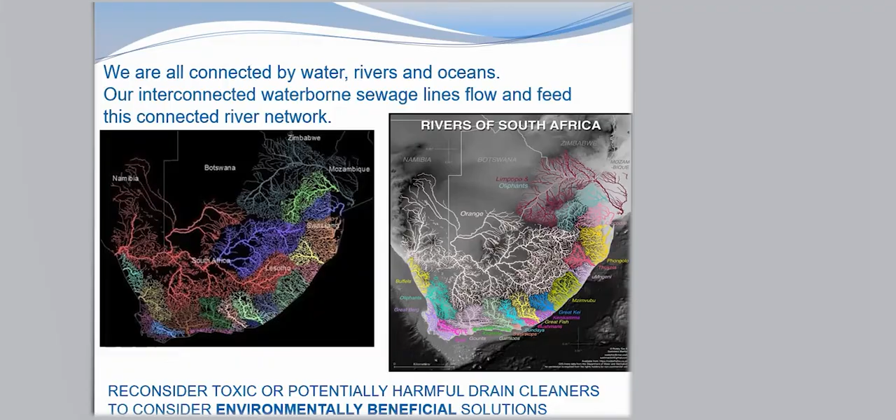No discharging of polluted fat trap wastewater into our landfills and rivers. This continuous discharging of untreated fat trap waste into landfills, or worse our rivers, has contributed to the decline in fish and plant life, along with wastewater treatment works pollution.

Excess phosphates and nitrates feed the aquatic weeds and algae in the dams.

From a legislation point of view, no landfill of liquids since 2019. Landfill prohibitions became effective on the 23rd of August 2019, and the Department of Environmental Affairs' LB Modise confirmed this regulation, with local legislation banning all liquid waste from landfill.

This signaled a positive shift in South African waste legislation. This legislation prohibiting liquid waste disposal was gazetted in August 2013, with a 6-year transition period for the industry to put the necessary measures in place.

So the rule is, if you can pick it up with a spade, then it's not liquid. A key benefit of this legislation, according to Modise, is that the country's groundwater reserves will receive protection from seeping hazardous liquids.

Landfills are known to produce leachate, liquid bearing soluble and suspended solids after it passes through matter, and this is difficult to manage and treat. This leachate has the potential to seep into groundwater pools.

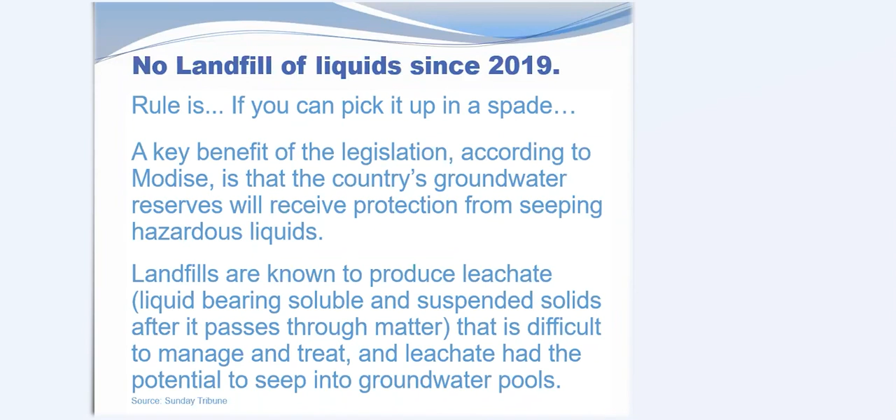Robert will carry on from this side. From a plumber's point, and also as homeowners, you've got to look out - if you see anyone dumping fats or light liquids into dustbins and into the drains, you have to report it. It's also a responsibility as plumbers as well.

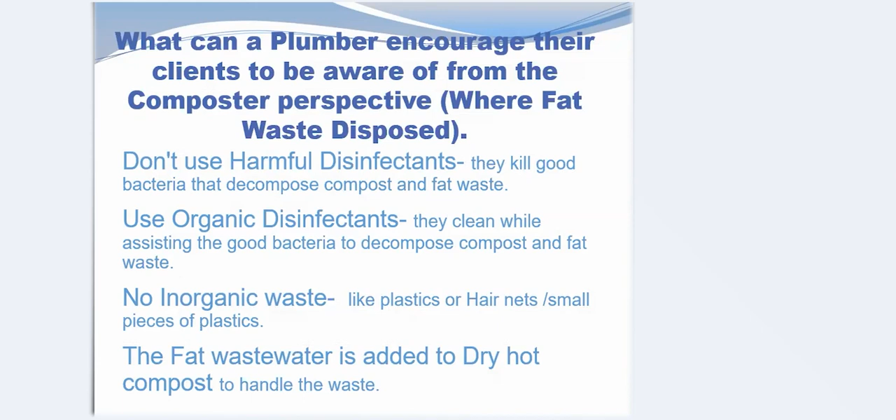So fat trap bioremediation, or microbes, and the plumber's role: it's a tool for the trusty toolbox. Microbes, just like your monkey wrench, are a very useful tool. And if you're on site and you've got everything else but the monkey wrench, but you need it, you're a bit stuck.

And so we believe this is a vital tool that can naturally help liquefy fats, oils, and greases without the use of potentially toxic, acidic, harmful, or carcinogenic chemicals related to unblocking long-term buildup in pipes. And it's safe for fish, plants, humans and animals. There are big health advantages of treating fat traps and drains using microbes.

That bioaugmentation process converts the anaerobic sludge environment into an aerobic one, killing off the waterborne diseases. So it turns the solids into gas and oxygen. And included in these blends are bacteria that compete with the cholera bacterium for food source, thus preventing cholera from spreading.

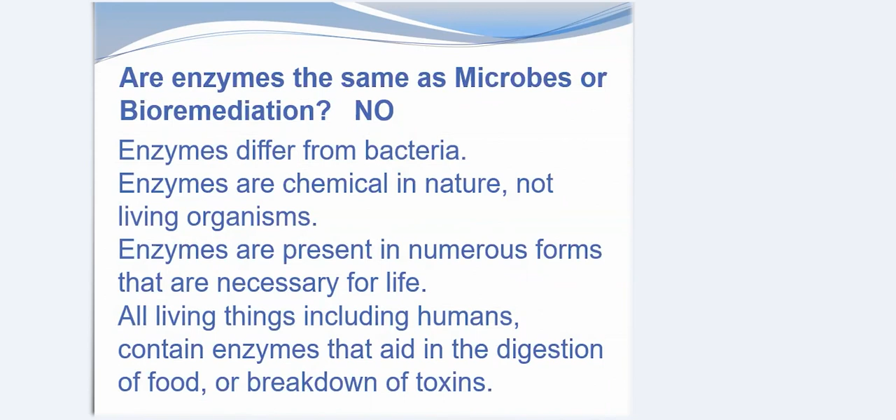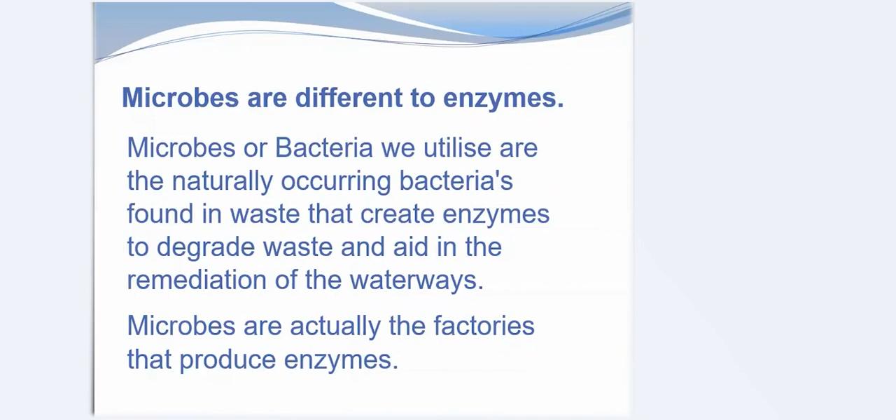The microbes or bacteria we utilize are naturally occurring bacteria found in waste that create enzymes to degrade the waste and aid in the remediation of the waterways. So microbes are actually the factories that produce these enzymes. And when we look at this model as a connected network, it's a tool for a top-down model, ideal for plumbers. It's like a probiotic for your drain.

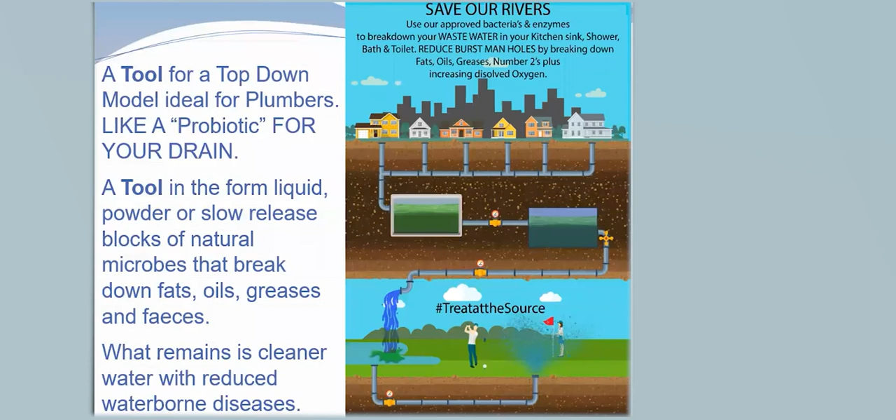So just like when you go to the GP and he or she gives you a prescription of antibiotics, they will now always give you a prescription of probiotics, and that's to restore the balance in your gut. So this is a tool in the form of a liquid, powder, or slow release blocks of natural microbes that break down the fats, oils, greases and feces. And what remains is cleaner water with reduced waterborne diseases.

So Robert? Sorry guys, so with the enzymes and the fats, you can actually pour it into the manholes, and it actually starts to break down the fats. So it breaks down the fats of long build-up, especially in complexes. We know that there's multiple people staying, they're washing their dishes and all this stuff. And there's always people that they'll say they don't pour the fats down, but they're cleaning the pots. There's still all of that.

It ends up in our drainage system, and that clogs up a line. And you need something that can break the fats down the line, especially even with the fat traps. You can pour the enzymes directly into the fat traps so that it can break down the fats in the system.

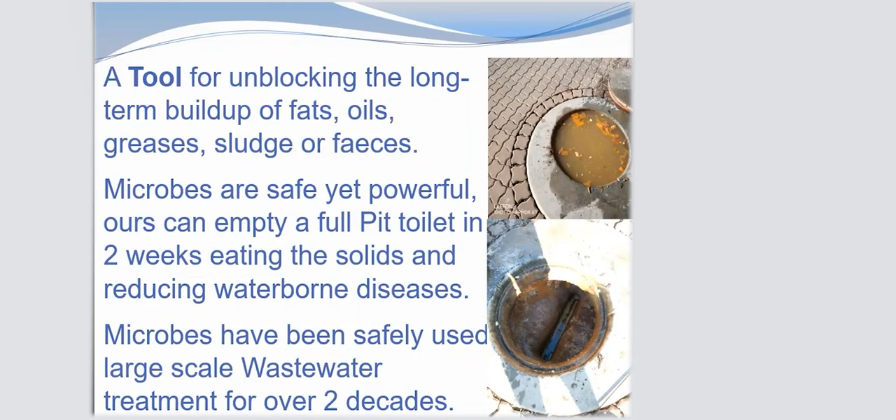And if I could just add in there, these different microbes have been added and used in large-scale wastewater treatment works in South Africa for over 2 decades. So there's a lot of history with this. Robert? Yeah, so we need to reconsider the chemicals that we use. So we got to look at stuff that doesn't harm the environment. And if you look at it, will you pour a bottle of drain acid into a fish pond or into your koi pond? No, you won't.

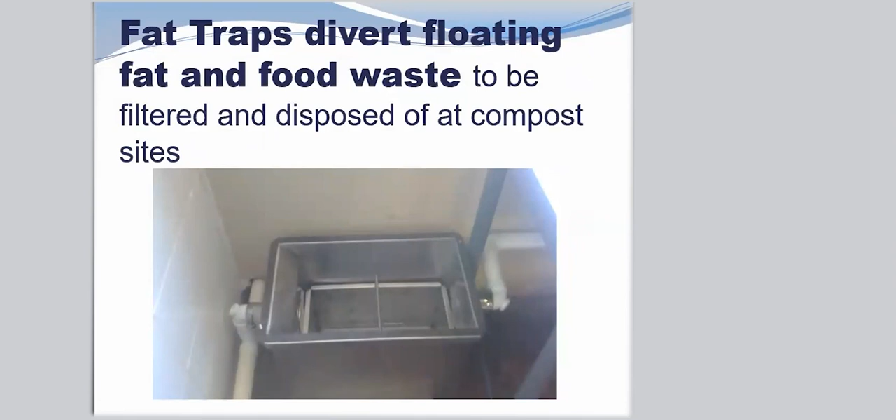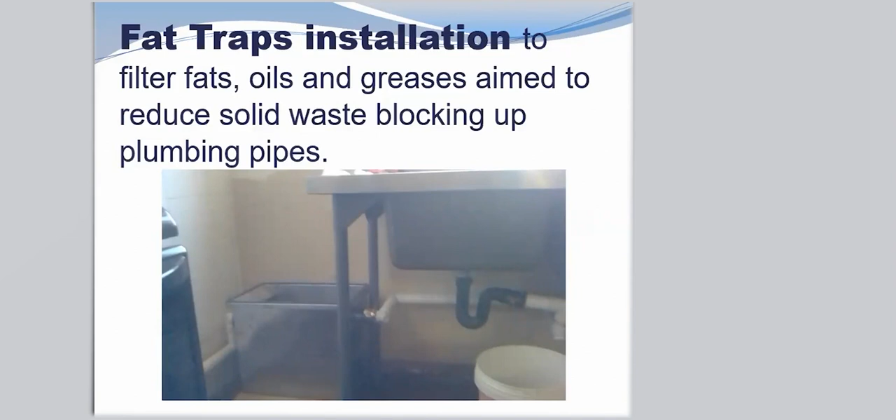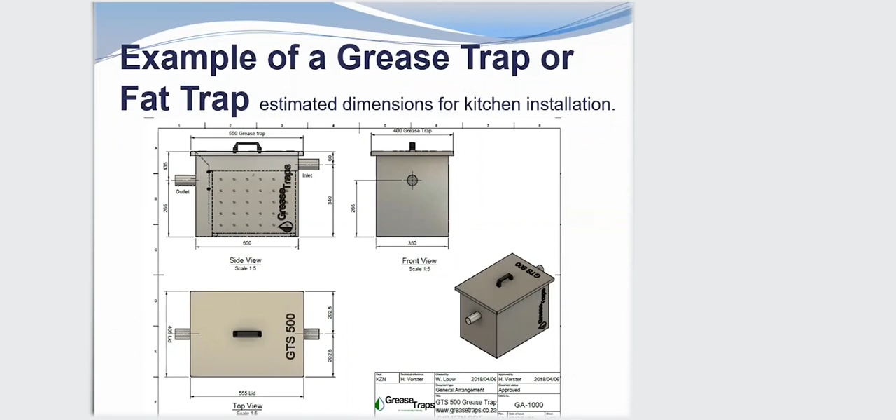You can move to the next one, Tom. And these things have to be maintained regularly, because otherwise it is going to start blocking the system. There's also a little bit of a side view of a grease trap or a separator. You separate the fats from the water. As you guys can see, you've got the inlet. It'll go into the bucket and the basket where it separates the fat, and then the water will go through. As you all know, oil and fat is lighter than water, so it will rise to the top, and the water will come through and discharge out the outlet there.

And this was from a little canteen. In this fat trap, the fat had actually solidified. So every time they used the water, it would just pour out the sides and run down the street, because this was a fat trap that wasn't maintained. So we need to look at breaking down the fats as well with something that can break down and eat them, with a natural bacteria that breaks down the fats. What remains is cleaner water, which reduces waterborne diseases. Now, this process removes smells and flies in 24 hours as it liquefies.

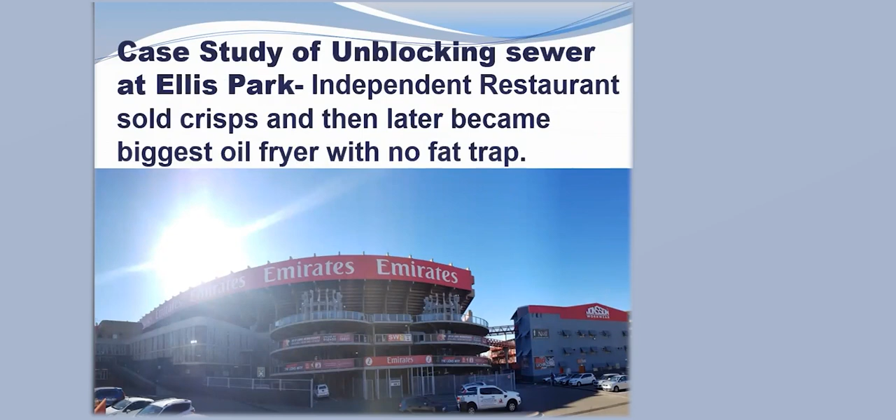And here's a case study. I'm sure we all know this stadium, Ellis Park Rugby Stadium. It had an independent restaurant which was just selling crisps and Coke drinks and things like that, and then later became one of the biggest oil fryers with no fat trap installed. And so the knock-on effect is pretty quick. The challenge they also had was that restaurant was also pouring used cooking oil down the drain.

So this was the manhole in 2018 before we treated, and you've got a thick fat crust. You can barely see the channel, and there was no flow confirmed. And Steven, who was the head plumber, alluded to me that this thing had actually been blocked for many, many years, and they tried the rods and they tried the acids and they tried everything they had at their disposal. And for 5 years, they hadn't managed to get it right.

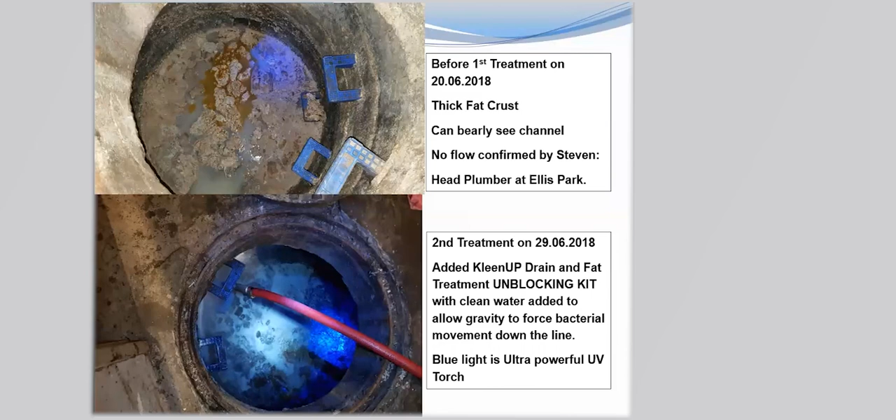And so we added the drain treatment with clean water and allowed gravity to force the bacterial movement down the line. That blue light you see there is just a UV torch. So this is before the third dosing here. You can see it's much more liquid. The fat crust has broken down and the wastewater is very liquid, with fist-sized chunks of fat rising to the top.

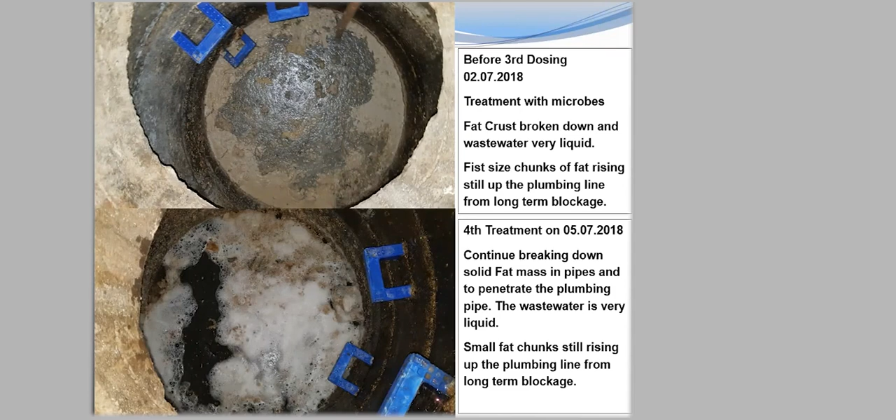So as Robert said, fat is lighter than water. So when you start to clear these lines of this long-term buildup, you have to do another dose afterwards because you get these chunks floating back up and you need to break those chunks down. And so by the fourth treatment here, we're continuing to break down the solid fat mass in the pipes and to penetrate the plumbing pipe. And this wastewater now is very liquid with very small chunks of fat up the plumbing line.

And the image on the top left here, that was the manhole downhill or downstream from that blocked manhole. And it was just solid fat. There was no flow. We added water. This is after 2 doses. We hadn't managed to get it to budge. And then on the third dose, we've got movement there. I was going to add a little video there. It's not very exciting, but you can just see the water flowing there. And the manhole was unblocked for the first time in 5 years, which was quite an amazing feat.

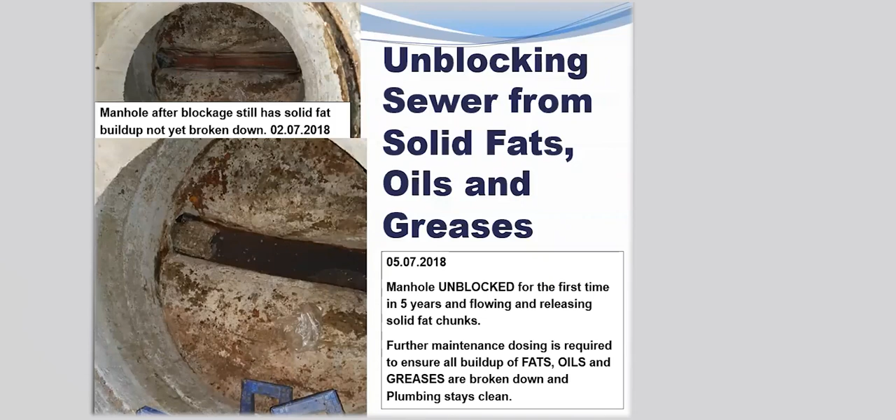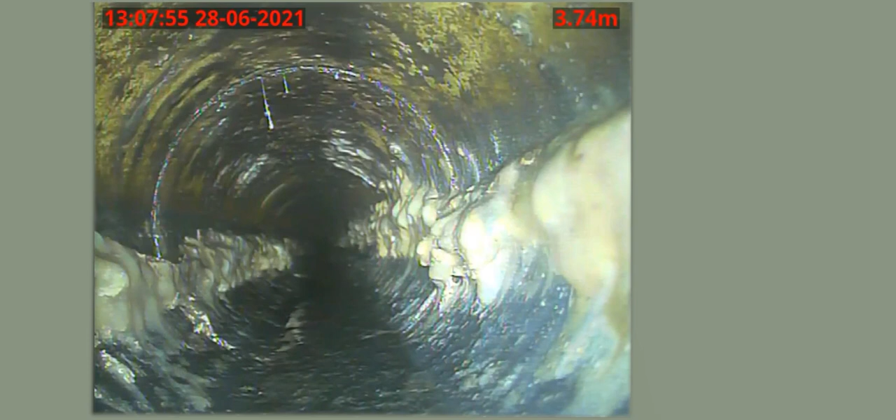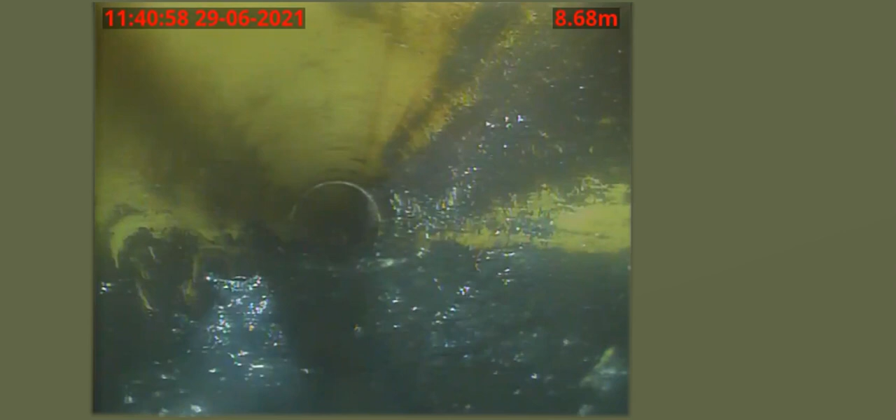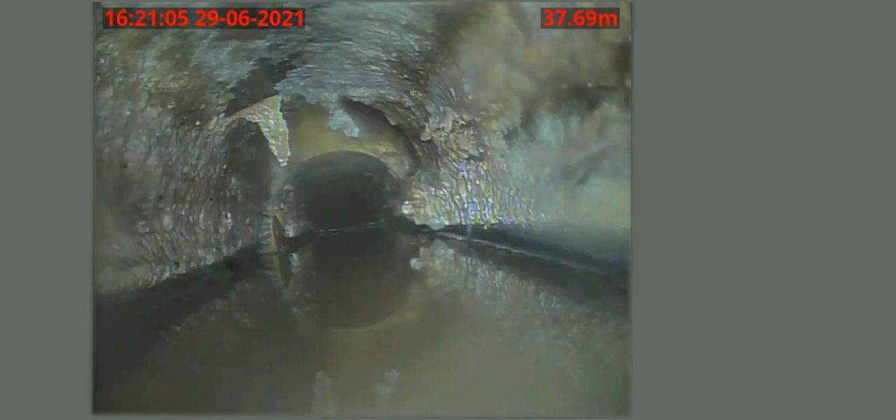This is just little images of how the fat builds up inside the lines of a drainage system where your camera went down. As you can see, the fats build up, and also a lot of the drain acid that's been poured down the line to try and break down the fats. But it just eventually solidifies. You can see the fats crusting up there. And as you all know, this will eventually start solidifying and becoming bigger and bigger, closing the holes there.

So I'm sure you guys know that in your pipe, you're going to install a new pipe. As you start getting water flowing down it, you get bacteria forming inside this pipe. And then a protective layer of slime builds up over that bacteria. And then the slime prevents oxygen from getting to that bacteria. And then that environment becomes anaerobic.

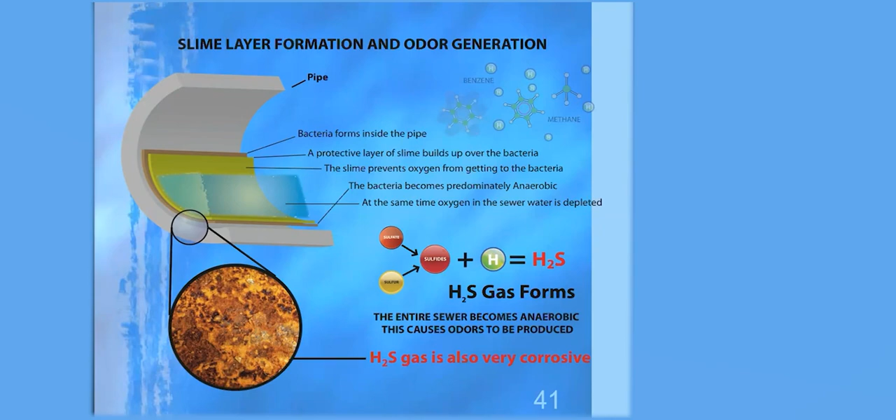And at the same time, the oxygen in the sewer line is also depleted. And then this is when you start to get all those noxious gases and things like that. So the entire sewer network becomes anaerobic, and that's where you get your odors.

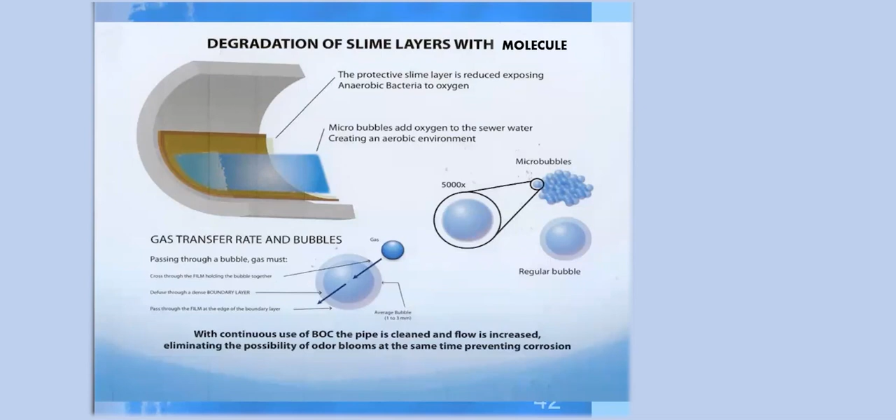And so we degrade that slime layer with these different molecules. The protective slime layer is reduced, exposing anaerobic bacteria to oxygen, and then the microbubbles add oxygen to the sewer water, creating an aerobic environment, and this helps with that remediation.

So this is an ongoing problem. Fat traps and grease traps and drains are blocking, and manholes are blocking, and then regularly bursting and flowing into stormwater drains, which then flow into our rivers.

And to give you an idea of what's going on in our local economy, in Midrand alone, according to a Joburg Water official, there are 500 burst manholes a month, which is just staggering. And Ekurhuleni says there are about 80 burst manholes a month, and their local area engineers say that their bakkies are out all the time unblocking. So they're not too sure if that number is accurate.

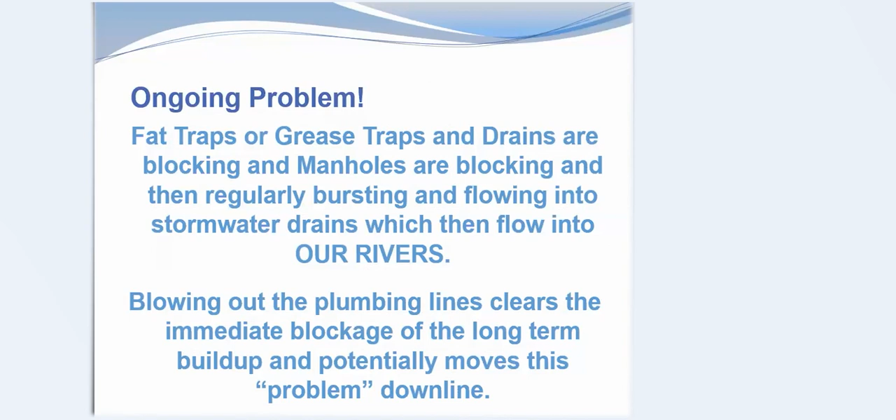So you've got really efficient and clever tools, like the jet truck blowing out the plumbing lines. It's very effective at clearing that immediate blockage. But unless you add these microbes into the jet truck, as we explained in the previous slideshow, you're not getting rid of that physical mass. You're literally stripping the pipe and clearing it, but it's moving down the hill.

So with a nature-based solution, you treat your fat traps and your grease traps and your drains with these microbes or probiotics, and you naturally break down the solids into liquids. And this helps clean up the long-term buildup and clears the foul odors without the use of toxic products.

And your butcheries and bakeries can continue operating while dosing. Nobody needs to clear the room or leave the room because of noxious, harmful drain cleaner smells. So this top-down approach can help to collectively reduce the burst manholes while solving your client's needs.

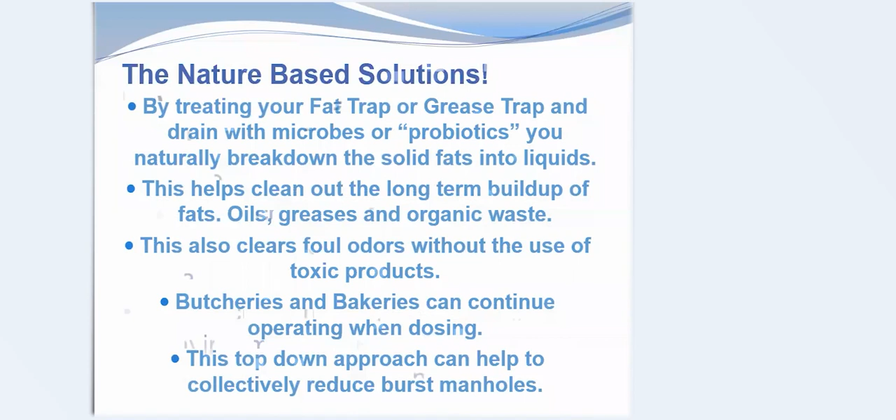How can microbes help increase revenue streams for the plumbers? You solve long-term repeat problems and switch to a monthly or a biannual treatment to ensure free-flowing drains, depending on the site and how frequently it would need to be dosed. And you can actually contact your old clients that you maybe haven't heard from for a while, or your current clients, to introduce this environmentally beneficial model and to help improve their waste footprint.

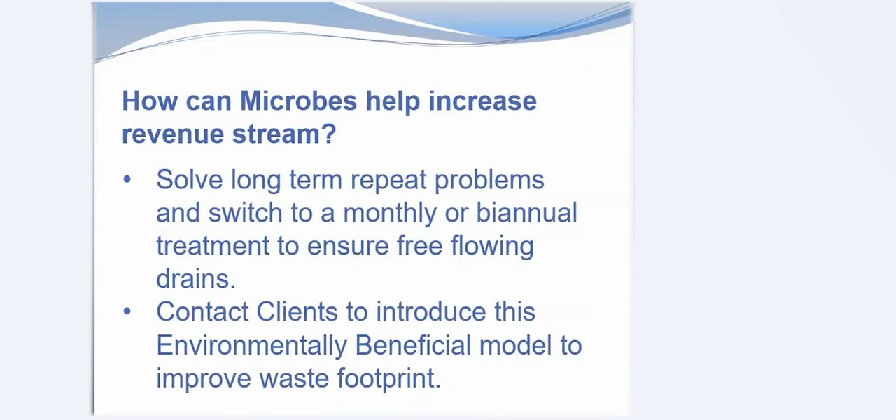What we're finding now in the industry, because I've been doing this for about 10 or 12 years now, is that the shareholders of the businesses are now mandating that change needs to happen. And so we can now actually attract new clients seeking alternative natural solutions to waste and fat treatment.

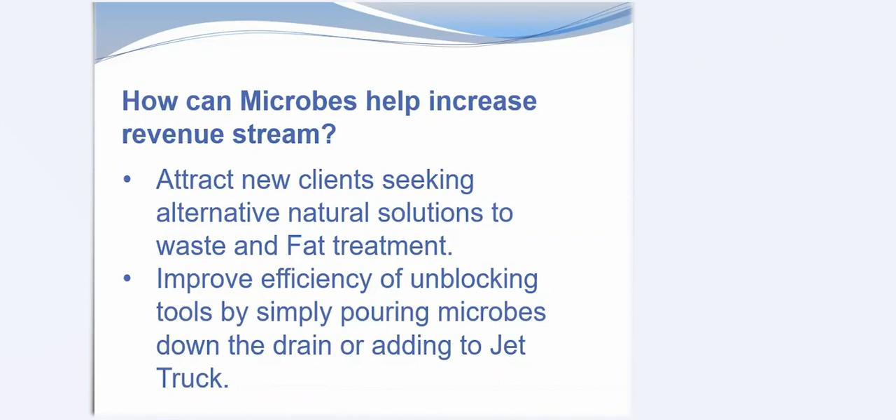And you can improve the efficiency of unblocking tools by simply pouring these microbes down the drain or adding them to the jet truck. And you can offer clients fat trap treatment solutions after fat trap installations to ensure ongoing compliance and plumbing maintenance revenue.

So just become part of the solution. When you use these different solutions here, they really are helping the collective ecosystem. So when you enjoy your fishing and going to the ocean and the sea and the rivers and all the different things that we enjoy with water, this is a real solution to help be part of the bigger solution.

I think from our side, guys, you also realize we are at the front end of all of this. It starts with us to help the wastewater treatment plants, and if we can start just shifting our mindset to more natural-based products in our drainage systems, we will be able to assist our water treatment works and our Department of Water by reducing the harmful chemicals in our water.